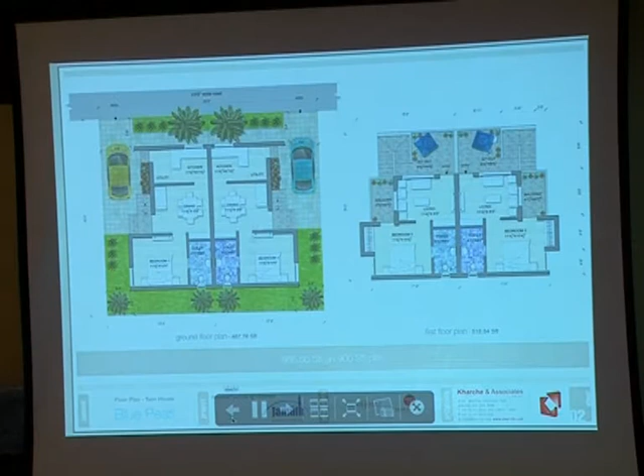Each house will have its own landscape area, separate balcony, separate view, everything. So when designing the project, what we were thinking was how we will make all these aspects connected to each other.

Ismail Bhai mentioned that in Keelakarai, mostly the wife's family will stay with the husband and wife. Usually that is the way. So what we thought was, how do we connect this concept to the existing concept of our master plan?

That's the first thing. Second thing is the citizenship, stewardship and responsibility of each person living there. Each person who is living in this township must feel that he is the owner of the township itself, not just of that house. It shouldn't just be that he lives in one house and feels disconnected. The feeling should be that within this township, this land, he belongs here and stays in this place.

Third thing is needs and rights of future generations. Once we live here, our family will grow. We will have children, right? So today it is just myself and my wife. Tomorrow, after maybe 2 or 3 years, I will have small children. So I need to cater to their needs. They need to go to a place where they can pray, play, and enjoy themselves.

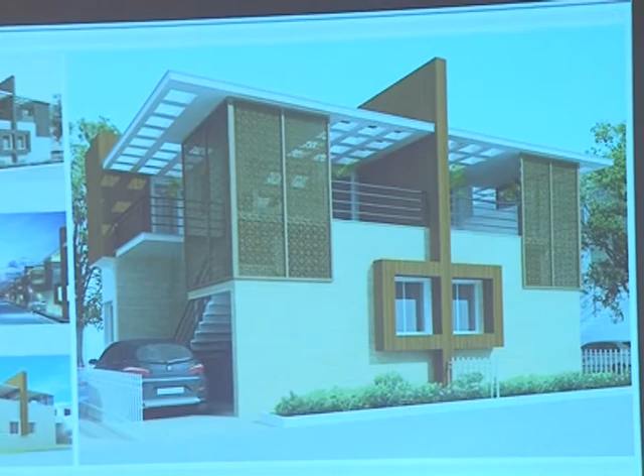The design features of this project - principally, the main entrance. That is a very crucial aspect in any master plan design in Keelakarai. So the main entrance to the township will also include a mosque, visitor center, interpretive programs, and attractive landscapes. The main entrance is what forms the beauty of the project.

So we have made sure that the main entrance is not only catering to the residents but also to the people around who are coming from outside. So that's also very important. Then of course we have the interpretive emphasis. The interpretive theme of this whole project can be construed in many ways.

This house is supposed to be in India, but at the same time, you should also feel that this house is emphasizing your character. I am so and so, I need to illustrate or express my character. So this house will basically be a medium for that.

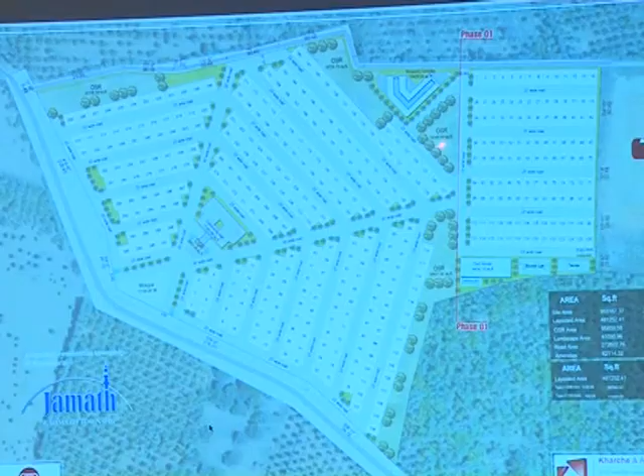Then the accessibility. One thing about this master plan is accessibility is basically the movement from one place to another. We have made sure that common areas, such as the mosque and the entrance, have different ways of accessing. You can access through vehicle, a two-wheeler or four-wheeler, or through pedestrian movement, or through cycles. So the accessibility is not restricted, you don't have any narrow roads around any of the common areas.

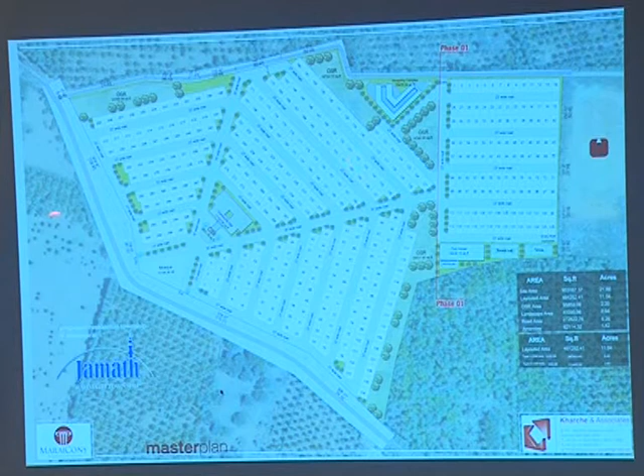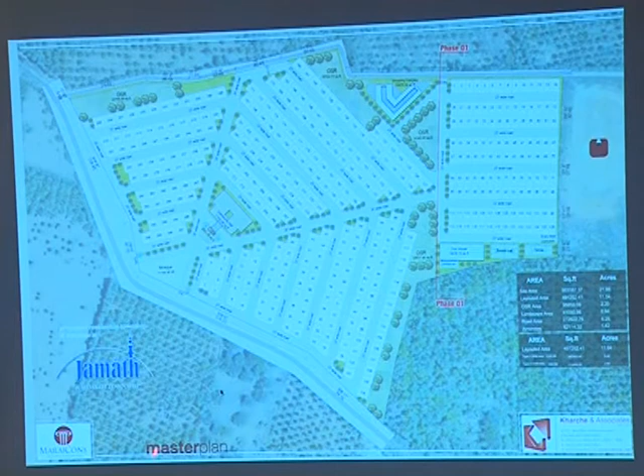Then of course we have the unified design theme. What we have done is we have created the design around a concentric circle, circle one after the other. This represents growth and represents a very positive vibration for anybody living in that place. So once you enter the place, your positive vibration will only grow. That is very important in any project - you must have a feeling of positiveness when you enter the project. That is created by creating these concentric circles around the central point.

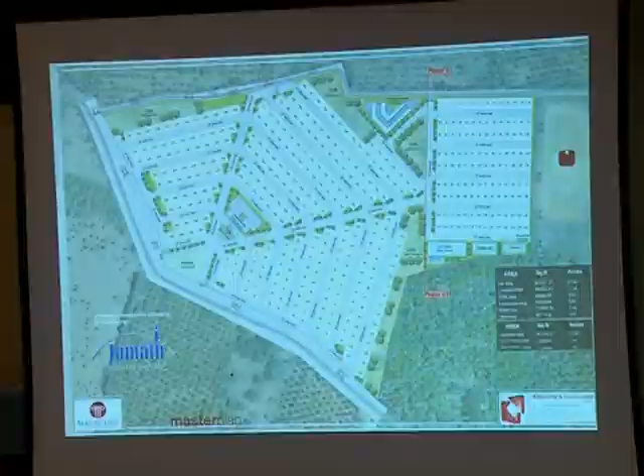Then go to the view. If you see the 3D view of this unit.

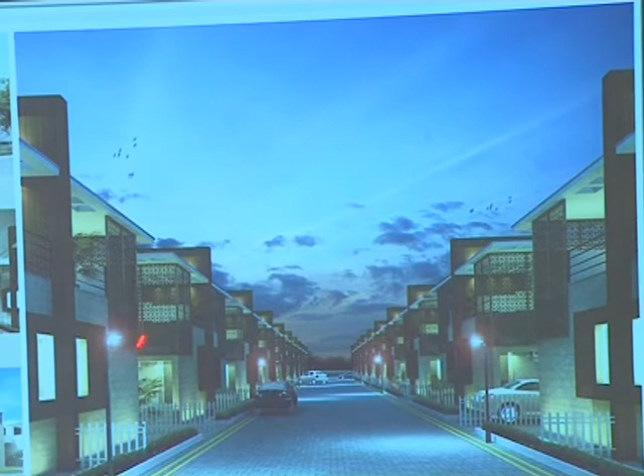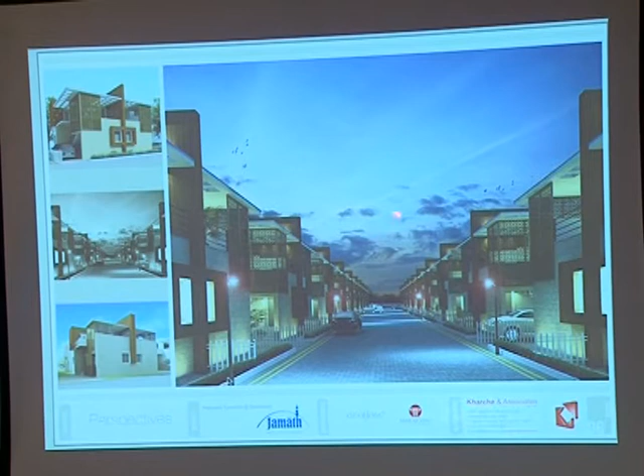So this is how the street side view looks, and we have our street lighting which makes it look very nice in the evening. And if you see, basically the movement pattern is very similar, very straight and simple. It's not complicated. Go back to the plans again.

So in the plan, basically this is the road. Kitchen has a separate entry, so we have given a separate entry. Dining room, this is one bedroom - this is where the elders will be staying on the ground floor, because we don't want them to climb steps. Sometimes they are unable to climb steps due to age, and they are more comfortable staying in the dining area.